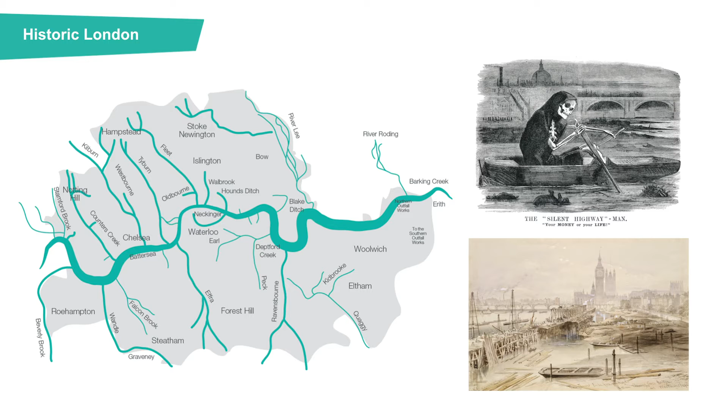So where does this all start? Well, those are the tributaries. If you go back 300 years, you'd have been able to see all these rivers around London. You can see very few of them now because most of them are now sewers. So the River Fleet, a big and recognisable point. It's why Fleet Street is called what it's called. And the Fleet River used to reach the Thames just where Blackfriars Road Bridge is. So if you can picture the Unilever building, which is on the north bank, just upstream of Blackfriars Bridge, it's got a curved shape to it. And that's because that was the shape of the bell mouth of the River Fleet as it joined the Thames. So that's how it looked.

But of course, as London became populated, we went from the process of throwing pounds of stuff out the window, which got to a point where that wasn't acceptable. So then cesspits were built, and that didn't really work either. The flushing water closet was invented, and that meant the volumes that had to be dealt with didn't work with a cesspit arrangement. And they were leaking. There were no standards or specifications, and your neighbour's basement was filling up with your business. So legislation was brought in progressively such that all the sewage being generated was channeled to the nearest river, the nearest tributary, which was fine. It solved a problem at a point in time.

But of course, what happened to those rivers? Well, they became sewers in their own right and were effectively culverted over. So the rivers became unrecognizable as a river. You still get the fluvial flows coming through some of them, but primarily now they're sewers. So that worked for a period of time until the population grew to about 2 million, by which point the River Thames itself was really just one enormous sewer.

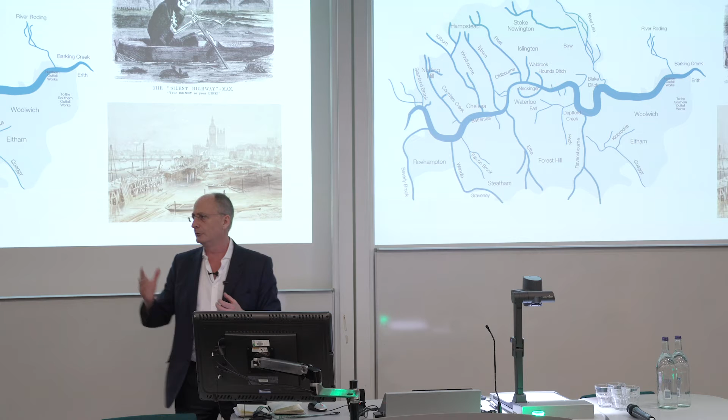And got to the point where, back in the 1850s and 60s, tens of thousands of people were dying of cholera and typhoid. There were lots of arguments that it was nothing to do with the water, it was the miasma, an airborne disease that was causing this illness, and eventually that was proven to be wrong, which really shouldn't have been rocket science because it was foul, it was stinking. And it was one particular summer in the late 1850s, I think, when the stench was so foul that Parliament was talking about moving to Oxford because it was just so unpleasant to be there.

And as the story goes, and I've not heard anyone contradict it, the reason that we have such a long parliamentary summer recess is because it was based on the summer that was really, really hot, where it was so foul they had an extended summer break, and that was a habit that stuck. It's funny, isn't it? So anyway, that got to a point where that was clearly unacceptable and something had to change. And it was the city's municipal engineer, Joseph Bazalgette, at the time, who was asked to do something about it. I think it's quite interesting that it's only when you really offend Parliament and the politicians that decisions get made. There's no parallels there today, obviously.

So, what did he do? Well, he built these interceptor sewers north and south of the river to intercept the tributaries that had become sewers and channel all of that to the east of London, to what we would now recognise as Beckton sewage treatment works. And his brief was a simple one, bearing in mind this is a very tidal river: the northern outfall on the north of the Thames had to be located such that, as sewage entered the river on a low tide and the tide came in, the sewage would get washed upriver. So it's located where it is because even on the most extreme tides, the sewage couldn't get to Westminster anymore. And that was part of the spec for the job. So that's why that bit's there. And that was very effective.

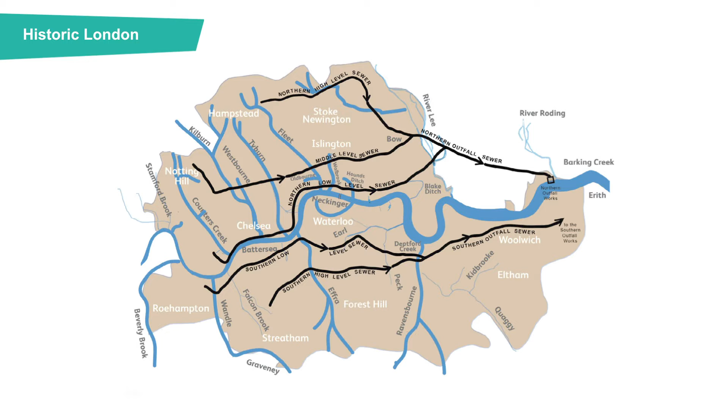And if you ever get a chance to go down the old Victorian sewers, which might sound a bit of an odd suggestion, I really would recommend it, because the quality of the workmanship there is just staggering. Bazalgette effectively invented the modern standard for OPC, ordinary Portland cement, because he saw such a variability of cement quality, and he knew this had to last a long time, so he set what was deemed an almost infeasibly high spec for the cement, but it is the basis of our modern spec for OPC, and it was achieved. So it's a work of art down there. The craftsmanship, the quality of the materials, it's amazing, and the system is doing exactly what it was designed to do, which is in normal times to protect the river and to take the sewage to the east.

There were 2 million people when that was going on, and we think Sir Joe probably had 4 million in mind. So he was thinking about doubling the size of the city, which I guess is something the Victorians excelled at in terms of being ambitious. But of course, there's nearly 9 million now, and we're talking about 10, 11, 12, depending on what report you read. So his system is doing exactly what it was designed to do. It's just overloaded. The Paviors have some of the blame for this, it's got to be said.

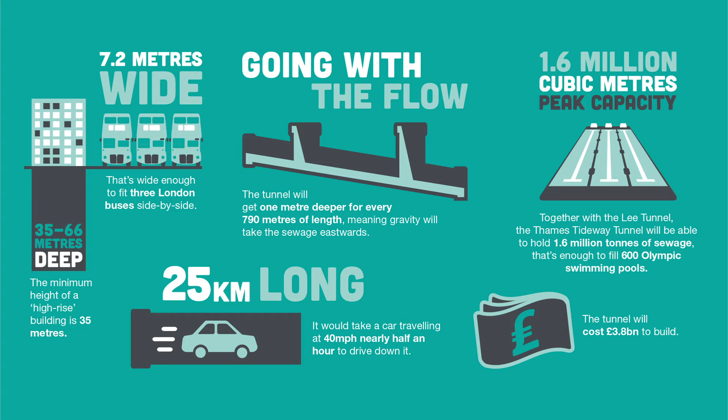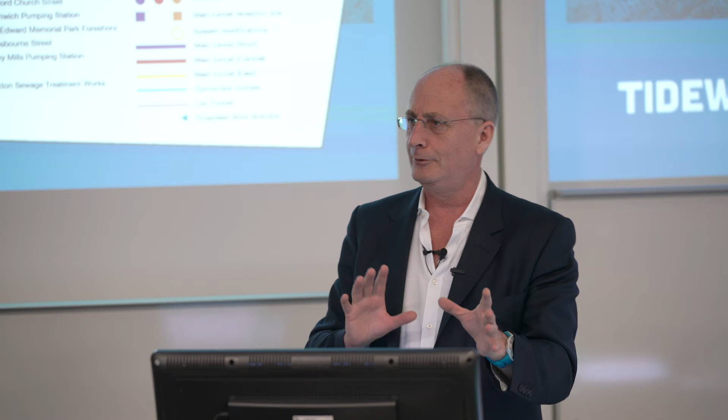Again, if you ever fancy going to a sewage pumping station, that's the station to go to. It is an architectural marvel, an industrial pump house. Why it looks the way it looks, I think we understand, because with all the work Bazalgette was doing, what he knew was that nobody would ever see it again. He had nothing to show for his efforts, so he threw the kitchen sink at Abbey Mills, so it's got architecture from different centuries and different parts of the world. It's a really impressive piece, but it was the only thing anyone was ever going to see again. So we get down to there, and we meet the Lee Tunnel, which was built and commissioned a few years ago.

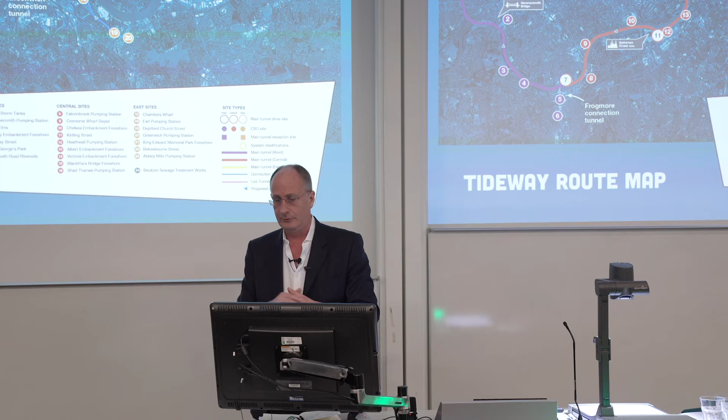Just a little bit further inland, and this is where you've got to admire the Victorians. While he was at it, I think just because he could, he built the world's first underground railway, which was the Metropolitan and City line at the time - it's now the District and Circle line. You've got to admire the Victorians for doing that, but that was all part of what was done then. So what do we do?

So we capture that sewage, we channel it to our drop shaft, and with a small connection tunnel, we go and join the main tunnel. Now there's a couple of interesting points in that drop shaft.

The first is that you'll notice the sewage is actually channeled down what we call a vortex generator. It's fed into the side of the vortex generator, so it spirals its way down. Because at Blackfriars, where the Fleet sewer comes in, when that's going full pelt, that's 30 tons a second coming out of the river wall and into the Thames. So we've got 30 tons a second, but we've then got to drop it 50 meters down a drop shaft. There's a huge amount of energy and force going on there.

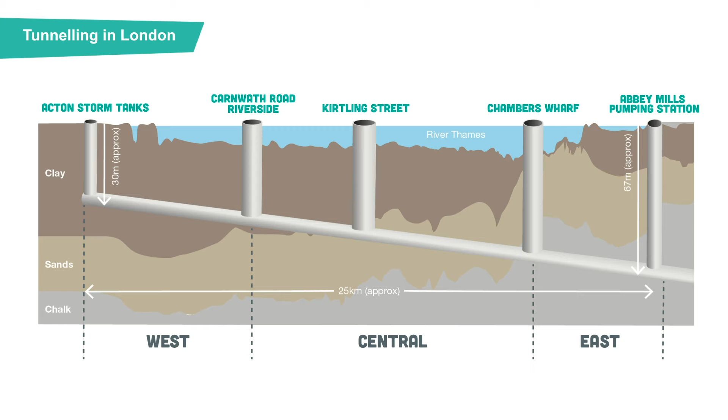Then below there, in the east, you're deeper still and into the chalk, which sounds really nice, but it's actually got flint boulders in that are massive, and it's quite challenging - it's very porous, with these big boulders in, strong stone, and that takes a different sort of treatment. So we've got different tunneling machines for the different areas, broken up in a geologically logical way.

So where do we fit with the other tunnels in London? We started at about the depth of the deeper tube tunnels, and you've got various other services running through there, the power tunnels and whatever. But we fall all the way through London, and then the lowest black line is the Lee Tunnel, the deepest tunnel built in London, which goes further down again because it's best part of 78 metres deep by the time it gets to Beckton sewage treatment works.

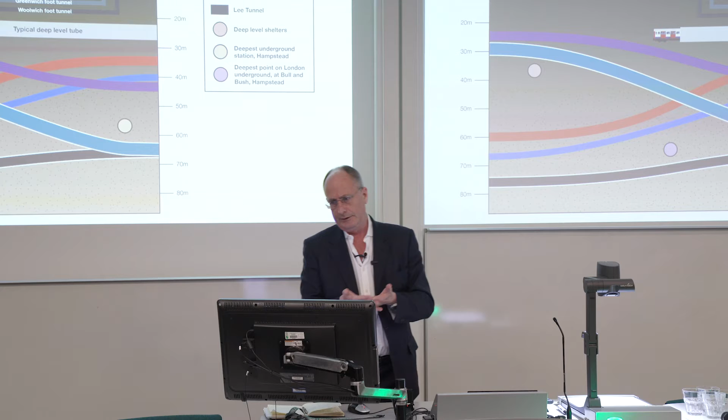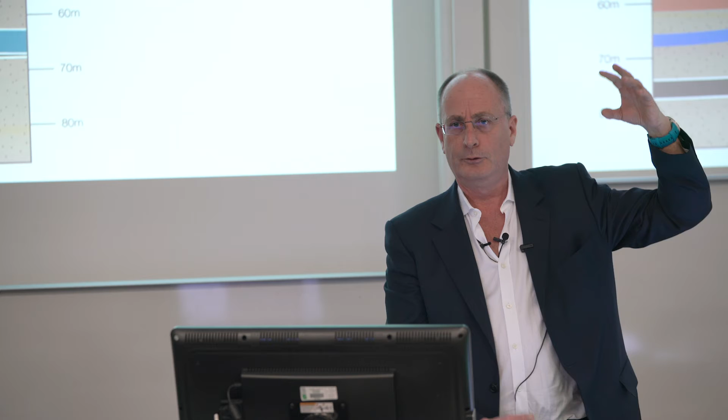What it means for us is that we're a long way away from most other tunnels or structures, and of course we're under the river anyway when there's no buildings above us. So in many ways it's a lot easier tunneling than we had on Crossrail. We don't have listed buildings above us. We're a lot further away. We're not just below the buildings from a settlement point of view. We're way below the piles either - we don't have to worry about eating through some of the piles, which is what we had to do on Crossrail.

So it works like that, and actually once you've got into the tunneling, it's a relatively straightforward process. The materials are challenging, but at least we're in control and we don't have some of these externalities that can be challenging.

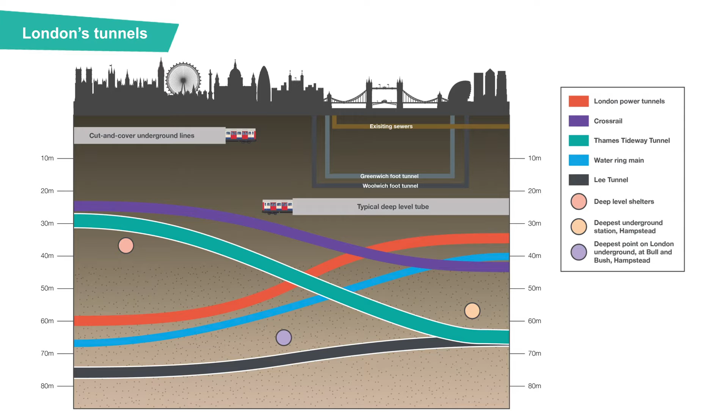When we talk about the other side of the story, the emotional side and the legacy and what it is we believe we're doing, we talk about it under these 5 headings. Now obviously, environmentally, the impact of removing the sewage is clear.

I got the whole board, shareholders, chairman, the lot out on the foreshore at Fulham last summer, where we were doing what was euphemistically called a wet wipe survey. You take a metre square and plonk it down on the foreshore, and with a little spoon-type thing you see how many wet wipes you can pick out of a square metre of the river - but of course it's not wet wipes, it's all the other things that people put into sewers. It's amazing, but that's how it is. Typically we were counting 200 to 300 items per square metre in the top 2 inches of the foreshore mud, which of course will stop once we've done our bit.

But London does have a question to answer, which is: that's fine, we're not adding to it anymore, but really somewhere along the line we need a scheme that goes back and takes all that away. It's just not necessary. I try not to be a river nerd, but sometimes when I see people on the foreshore with their kids running around, I'm thinking, oh my goodness - on the one hand it's important that people commune with nature, but it's also important to understand what you're communing with exactly. So we have to work on that.

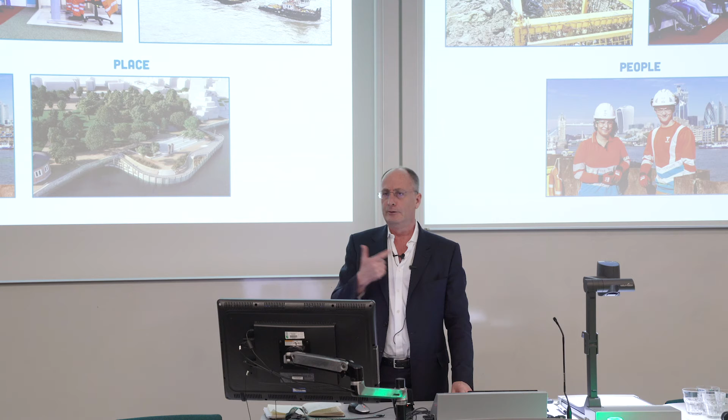And then the place piece I'd like to talk about later. You don't often get a chance to create new London. You can knock stuff down and build something else, but you don't often get a chance to create a new piece of acreage. So we'll have a look at that.

But let's take the transportation story. If all the material went by road, there'd be just over 500,000 vehicles. So that's a million journeys, 1 in and 1 out. We had obligations under the planning permission, under the development consent order, to reduce that by some 50%. And the contractors, when they bid, reduced it naturally more. And we said, well, that's fine, but having awarded the contracts, now what can we do to use the river even more? And we went further again to take that down to an over 70% reduction.

So all of our excavated material in the shafts and the tunnels comes out by river. All of our tunnel segments come in by river. It makes a huge amount more sense. You don't get traffic jams out there, and it only gets fogged off maybe 1 day every 2 years. So it's a way more sensible way of shipping stuff anyway. So let's have a look at our very own Terry Wogan, James Carew, who put this piece together.

Rivers, the lifeblood of cities across the globe. It's the reason they're located here in the first place. People use them for transport, for trade, even for food. Then in the 19th and the 20th centuries, it became about roads, railways, eventually the skies. But the rivers are making a comeback.

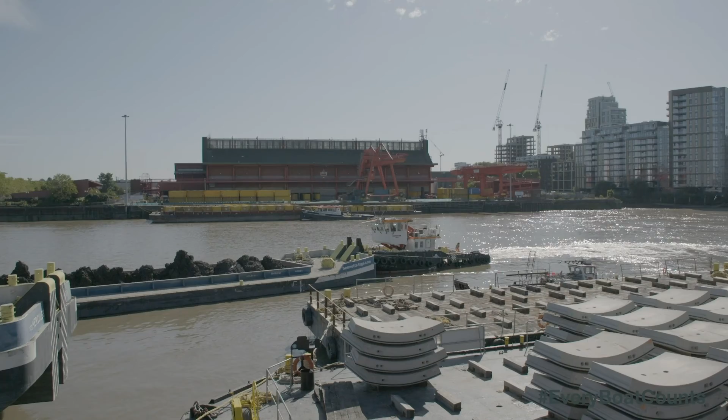You might know the Tideway is building a super-sewer deep beneath the Thames. It's a 25-kilometre long tunnel going from West London all the way to East. But did you also know that they're using the river on a scale we've never seen before? So Nargis, what's happening here at Carnwath Road? So Carnwath Road is the main drive site for the west section of Tideway, and our tunnel boring machine is going all the way from Fulham to Acton.

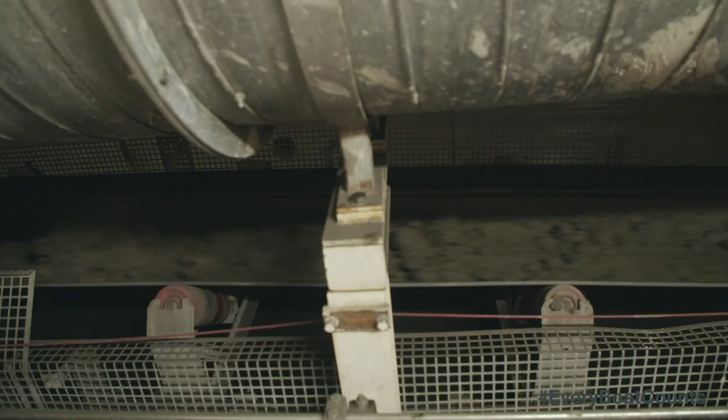And how are you using the river? So the excavated material from the tunnel is getting brought up on a conveyor belt, which is then loaded onto barges at our site. So you're taking all this material and putting it on barges instead of lorries? Yeah, exactly. Ed, what are we looking at behind us? A barge changeover between a light empty barge and a loaded 1,500-ton barge full of muck. Typically, how many trucks would one barge take off the road? We argue that one barge movement of a 1,000-ton barge can take up to 50 lorry movements off the road in one big hit.

Using the river instead of roads is good news for cyclists and pedestrians. In fact, at its peak, Tideway is keeping up to 200 lorries off London streets every single day. And this has other benefits for the environment too. Compared to lorries, barges produce 90% less carbon dioxide and 86% less nitrogen dioxide. That's a breath of fresh air. All of this makes using the river a no-brainer. The Thames is bustling once more, busier than it's been for centuries. So while the super-sewer is bringing the river back to life, it's also bringing life back to the river.

I've got to wait and listen to the seagulls, sorry.

So that was our Every Boat Counts campaign, which, yes, of course, is about us waving the flag and saying, aren't we doing a good job? But what we're really trying to do is say, we need to think about this river in a different way. We need to think about what this river can bring to us. And for sure, if you talk to the Company of Watermen and Lightermen, which is a 400-year-old company, the Lightermen were the barge operators. They were the people that rode the cargo, and the Watermen were the taxi drivers of the day. And really, we should be thinking of the river in that way more and more.

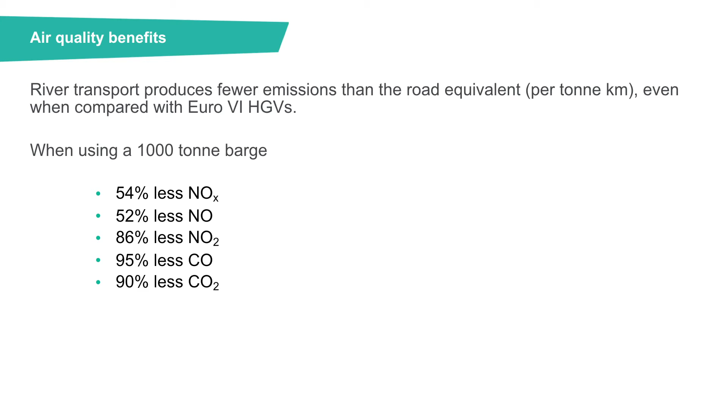What James was saying there, we didn't have any data when we started, so we strapped a whole bunch of monitors onto the barges that we were using, and these sort of statistics come out. 95% less carbon monoxide, 90% less carbon dioxide, 86% less NO2 and the particulates piece. And of course, you're out in the middle of the river, so it gets dispersed much more quickly and is therefore less impactful on people. So these are all thumping good reasons why we should think of the river in a different way.

So part of the piece that obviously we do, and again, I don't think we're any different to any other large project, is how we engage, and we start with the schools and the whole STEM piece, the tree planting, working with the communities and helping people understand the opportunities working in construction. We've been at Pride for the last 3 years. I think this will be the 4th year this year. And it's important that we understand how to maintain the support of our stakeholders with a capital S, if that's how you say it.

Princess Anne very kindly did take up the offer of going down a sewer and having a look. So my comms team, we were watching an event on the river, and Princess Anne joined us for a short while, and someone in my comms team said, ask her if she wants to go down. And I thought they said go down the sewer. What they said was go and have a look at one of our sites and go on a new tunnelling machine. I invited her down a sewer, and she said, yes, I'd love to. Bless her. And she was thrilled. She genuinely was.

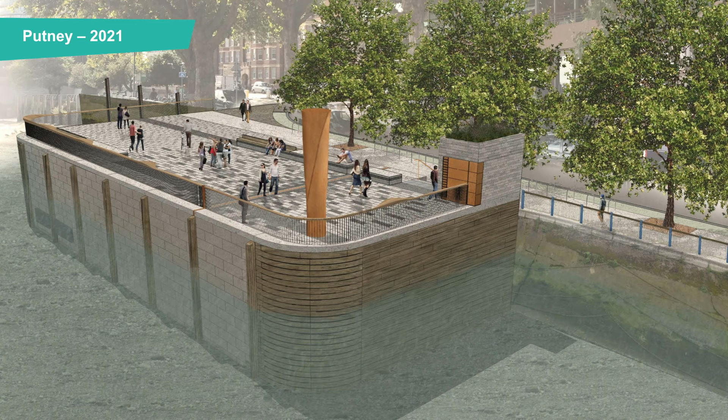So the lasting legacy piece, the land that we build out. In a couple of cases when we build out into the river, we've got to take it all away again when we finish, but in a lot of cases, the shafts that we're building will be within the land that we leave behind, so that's what we're leaving behind at Putney. This will be one of the first sites to finish, so I'm hoping for the boat race in 2021, that's what that piece of Putney is going to look like.

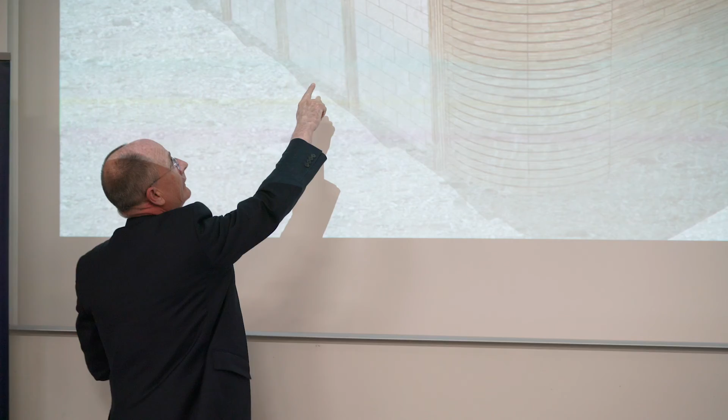That line that you can see coming off that fender there is the start of the Oxford-Cambridge boat race. It's written into the development consent order that once a year we have to remove anything that's in the way of the sight line of the start because someone needs to blow a whistle. But we'll be leaving that piece behind. The twisted chimney that you see is a vent column, so it's the exhaust of one of the air outlets. And there's a whole scrubbing system, carbon filters and all that sort of stuff so that the air doesn't smell.

But we've put a lot of thought into what we leave behind, and you'll see it when we've put them in place, but that spiral spine, every single one of those has got a short poem, almost like a haiku, which is relevant to the area and tells a little bit of a story about the history of the area. Now, is anyone ever going to see that or understand what the heck we're on about? I don't know, but I think a lot of thought has gone into what we leave behind and what that could mean to people.

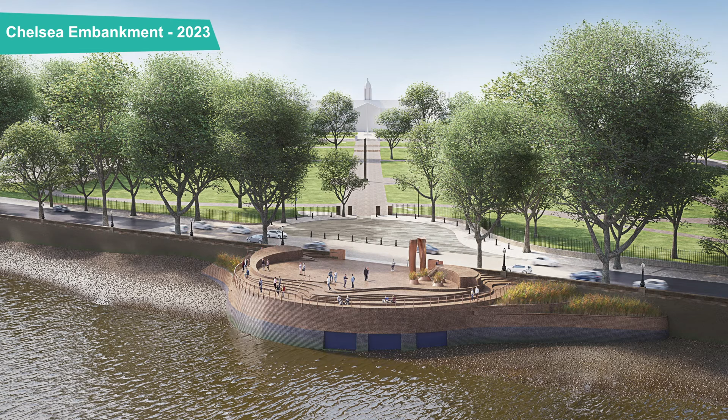So that's Chelsea Embankment where the flower show is, obviously the Chelsea Hospital behind it there, and again trying to reflect part of the London infrastructure that's already existing in a different way. These are floodable public realm spaces, so where the reeds are is an area that the public can get into. It gave some people the heebie-jeebies that we were encouraging people to get into a floodable space where you can get hit by the wash of boats going by, but the thing we keep saying, coming from Cornwall, the beaches flood every day, but we don't fence them off.

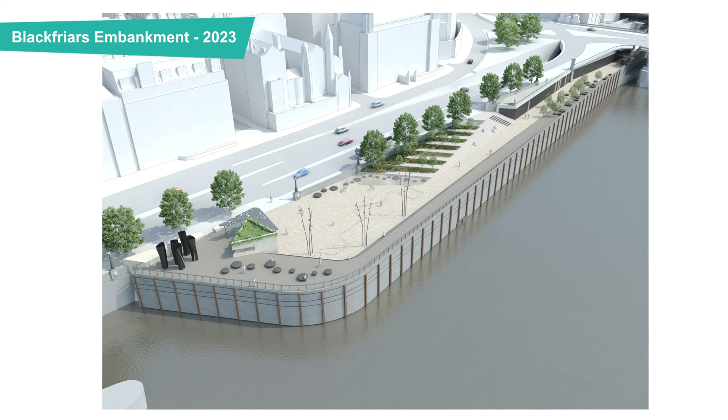And then you've got Blackfriars, our single largest space. As this new piece of land tapers in, that's where the spill point of the Fleet sewer is. And we have a channel that runs from the bridge all the way to the widest part of this piece of land, which is where the drop shaft is. And that's the space we're leaving behind. It's about 1.5 acres of new London.

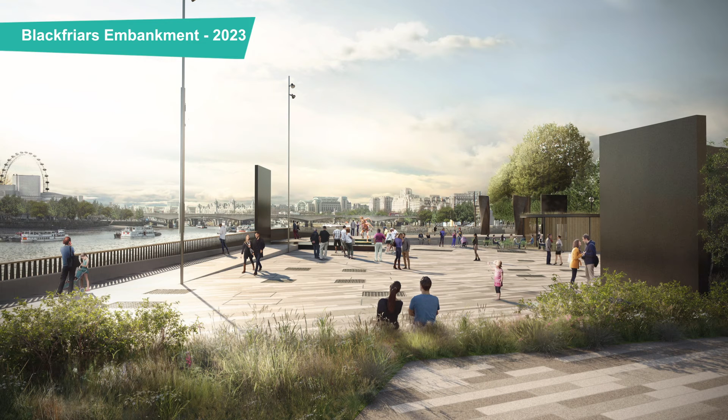You can see the vent columns again, and that was the proposal at the time of planning permission. That's what it now looks like to us. Again, a huge amount of effort gone into there. It's a natural meeting place for people. It's where, in future, the clipper services that go upriver and downriver will meet at the Blackfriars Pier. It's where the cycle superhighways cross, and it's where the Blackfriars railway station, another piece of form I've got, meets the tubes and whatever. So it's a natural meeting point.

So for every single one of our sites, we've commissioned an artist-come-architect to help us understand what we should be leaving behind. It's quite daunting. It's easy to come up with something that's really cool and of the moment, but what we'd hate to think is that in 10 years' time, people look at it and think, what were they on? So this is where we are.

The artist is a chap called Nathan Coley, and his concept, with this sort of people meeting in mind, is these black pieces, which he calls the black stages, where he talks about a space within a space. And this is a place where you could imagine meeting someone for an occasion or whatever. I like it. They're quite big. These things are 5 meters high. They're not, but it's a big space. You could argue, is that a bit brutal? I don't think it is. I think it's in context with the space that we're creating.

But as I say, here's a civil engineer talking in quite a different way about what we're doing. But I think it's really, really important if we're really to achieve the effect we want. So that's called Blackfriars Embankment, except it's not, because we got it renamed Bazalgette Embankment, which is just marvellous. Yeah, genuinely, that's what it's going to be called. So you'll see a sign with that on it in some years to come.

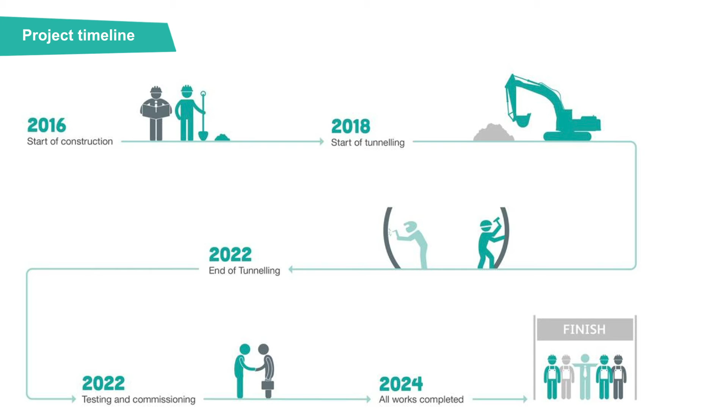Latest progress. So we started tunnelling in '18. We're in the middle of tunnelling now. By early next week, we will have completed 12.5 kilometres of the main 25-kilometre tunnel. So we're halfway there on the main tunnelling, and we're going full pelt. We'll finish tunnelling back end of '22. By the end of '22 into '23, we'll start the testing and commissioning, and we should be all done by 2024, at which point I pack up and let someone else have a go.

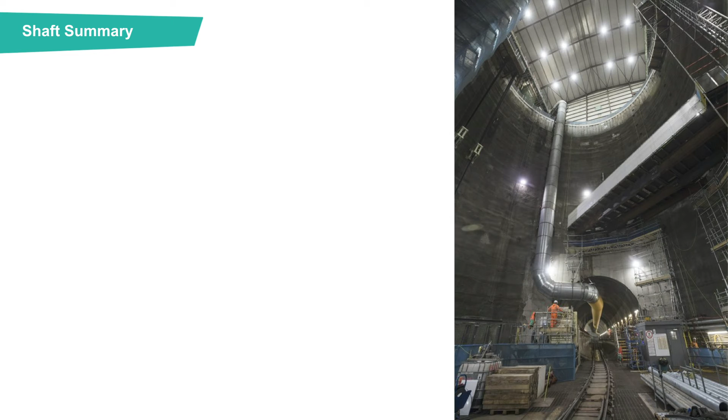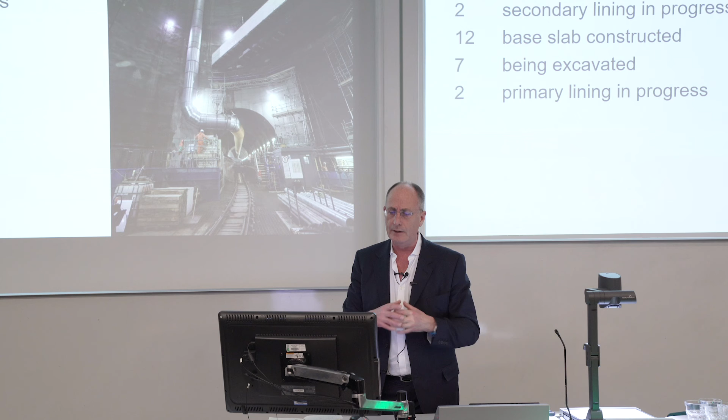Shafts, we've got 23 shafts. We're working on all of them. We're now completing the secondary lining, because everything we do has got the primary lining, which is the structural one that allowed us to build it, and then there's a secondary lining, and that goes for the main tunnel and the shafts as well. Because if you think of it, you're 70 meters deep, you've got potentially 8 atmospheres of sewage trying to get out into the aquifer, and equally if the tunnel was empty and the aquifer is high, you've got a similar amount of atmospheres trying to get into the sewer, and neither of which is a good idea. So everything's secondarily lined.

We've built most of them. We've only got 2 shafts that are still in the primary lining stage. Most of them are formed. And from a civil engineering point of view, the point at which you can get the big base plug in is a really exciting point, because at that point you've stabilized the excavation, and what you do thereafter, again, is much more under your control. So that's kind of fun.

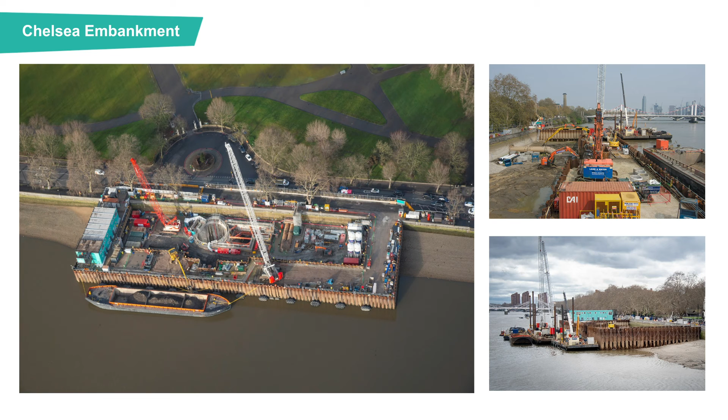So typically, therefore, what you now see is one of our sites, this one, the Chelsea one, which is a great big rectangular cofferdam, but you can see the shaft, you can see the bit next door, which is the interception chamber on the right-hand side, which is what all of our sites have. So they're all broadly in that kind of shape.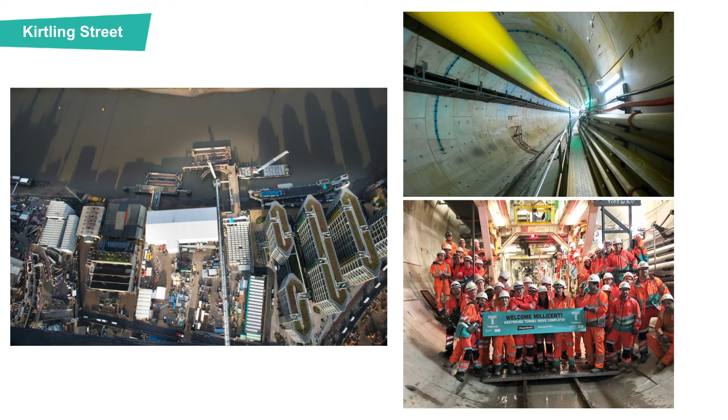Kirtling Street, that's our double drive site. So we have a TBM goes west and a TBM goes east, and that's within the grey shed there. All of our tunnelling is done within an acoustic shed so that we can tunnel 24/7 and not disturb the neighbours. And that's Battersea Power Station next door.

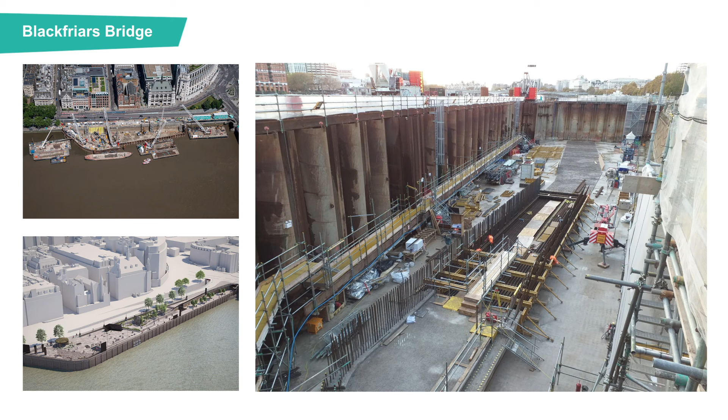That should be happening in about June time. So if you keep an eye on the website, you'll be able to go and see that. Knowing the team, they'll do it at night because no one likes people watching them when they're doing things like that. But if you're really keen, you will be able to see that happen later on this year. And again, that's a slightly more detailed picture of it from just a few weeks ago.

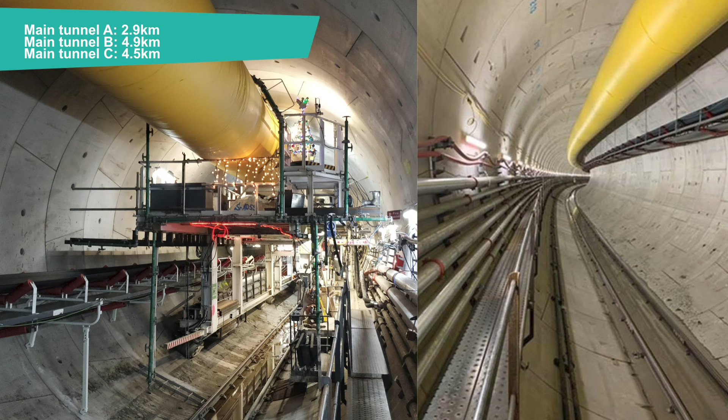So yes, tunnelling. Main Tunnel A is working its way, about to pass Hammersmith Bridge. Main Tunnel B is finished at 4.9 kilometres. Main Tunnel C has left Battersea and is now actually at Blackfriars, at that location, having its teeth repaired before it takes its last piece of the journey off down to Southwark.

Going well. This is something that we didn't do on Crossrail, which is put a live map of where our tunnelling machines are, for fear of people claiming that was the day their windows cracked. But we don't have people above us, so we can be a little bit more open about where our machines are. I won't click it, but if you want to have a look at that, you can see where the machines are on any day of the week.

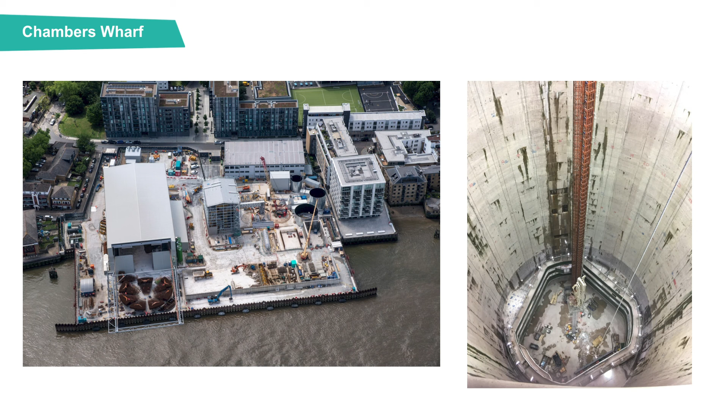Chambers Wharf down in Southwark, again, same idea. Those are actually the prefab rebar cages for the base slab pour. So that was taken a little while ago, and that's our acoustic shed again. What you see on the right is the slip form preparations for the slip forming for the secondary lining. That has actually now finished last week.

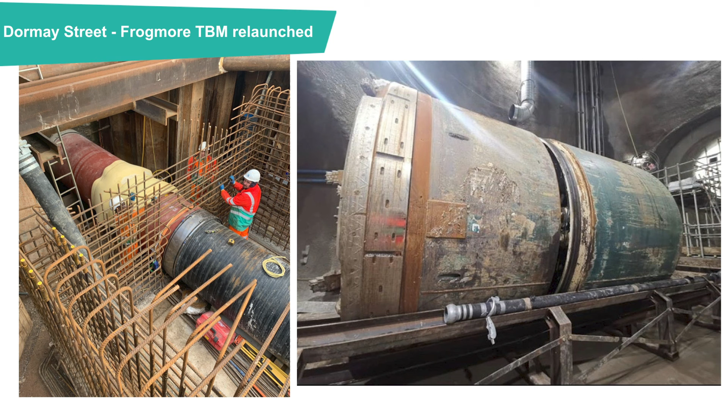A few more bits. Yes, there's another TBM. The photo on the left is interesting. That is how we've treated, because if you imagine, we're intercepting and therefore building right next to the existing sewer network. So that is a temporary flume which is passing straight through our works which we're building. That is a live sewer. We've channelled the system through that. We'll build the whole interception chamber around it, and the last thing we do is basically take that pipe out, and then our system is live at that point.

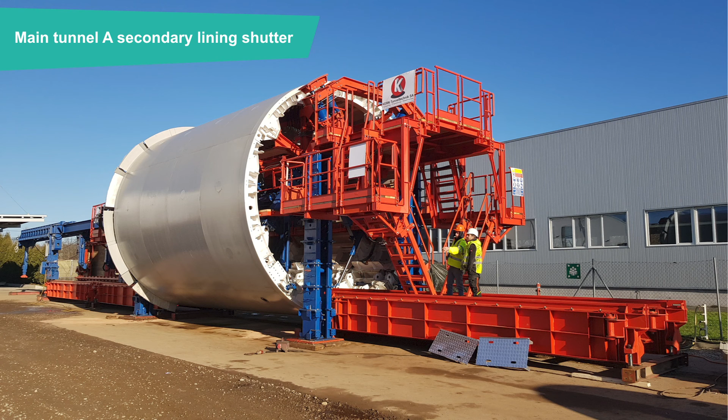Recent favourites, nearly there. So secondary lining, as I said, that's Main Tunnel A, the one that's heading off towards Hammersmith. That's the secondary lining, one of the secondary lining shutters that's part of that process.

TBMs are typically 120 metres long. This secondary lining setup allows us to pour 300 cubic metres of concrete every day on a hit-and-miss stitch basis. You pour those, then shunt up and pour the next set, working your way up the line. That whole train is something like 240 metres long. It's a big piece of process and a big piece of kit, and that's just kind of cool.

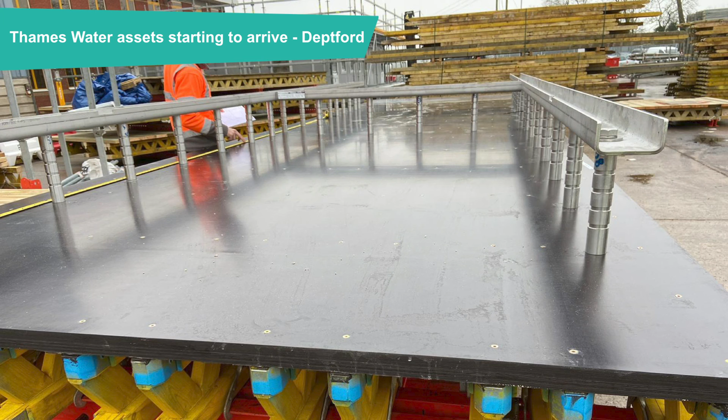That's just a piece of embedment, but the reason it's exciting is that these are the first pieces of the operating sewer now being prepared against the formwork and starting to be cast in. So we're getting through the pure civils phase, the pure concrete phase, and now getting into the start of the mechanical phase.

Exciting for some of us.

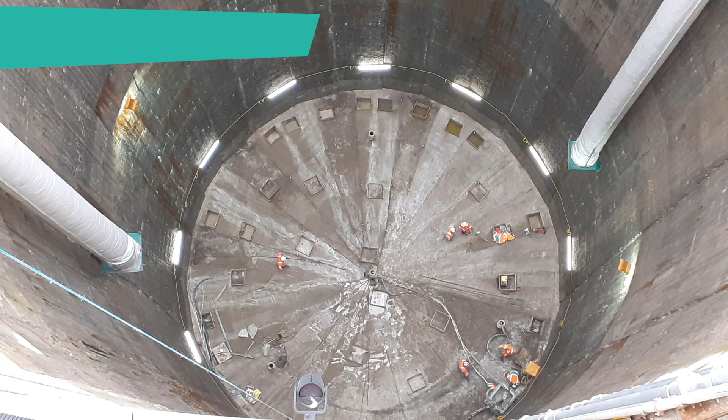Most of what we do is underground, so that's really cool, because a couple of weeks ago we poured our first ground slab. That's at Acton, the interception chamber underneath. It's a small piece of civil engineering but a big step. That's just one of the bases of the shafts. It's quite photogenic, which is why I put it in, really.

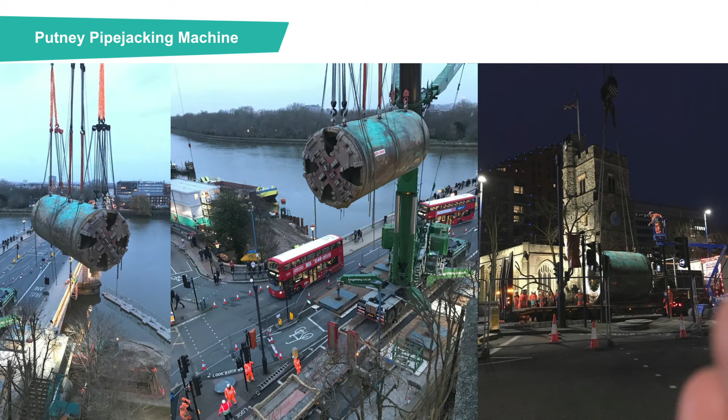I like this because that's a pipe jack machine at Putney, which came out. You might have known Putney Bridge was closed on the 2nd of February - that was us, to allow us to do this. And it kind of fits nicely, very photogenically with the double-decker bus, and eventually got landed next to the church.

The construction industry is moving on. It's not the world that perhaps it was when I first joined it.

When we first put it out on the notice board asking if anyone was interested in mental health and learning more about this, we were inundated. I'll be honest, I was thinking this is a bunch of men who are crap at talking and no one's ever going to want to do this, but we were inundated with people from every level of the organisation saying yes, I want to know more. It's all part of building a culture that's way more inclusive, caring, and thoughtful in general.